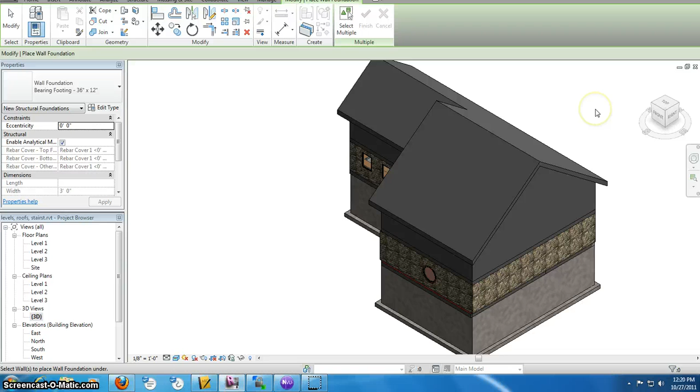Alright, one of the last things we need to be able to do to our house is put a site topography and dirt around our house, with maybe even some trees and other things. What I'm going to do is go into my site plan, and I should reset the roof visibility so I can see the roof and everything on there.

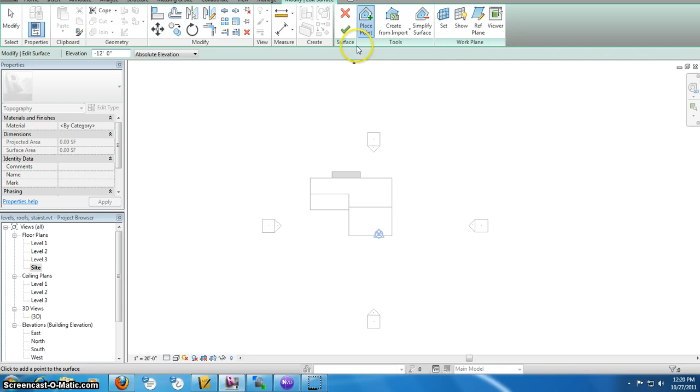I'm going to create a yard. So I'll go up to my Massing and Site button, and go to the Toposurface button. The first thing I need to look at is the elevation for my points. My basement wall was 12 foot down, so I'm going to go down negative 12 foot. Now it says to place a point, so I'm just going to left click, left click, left click, and left click. I just created my yard.

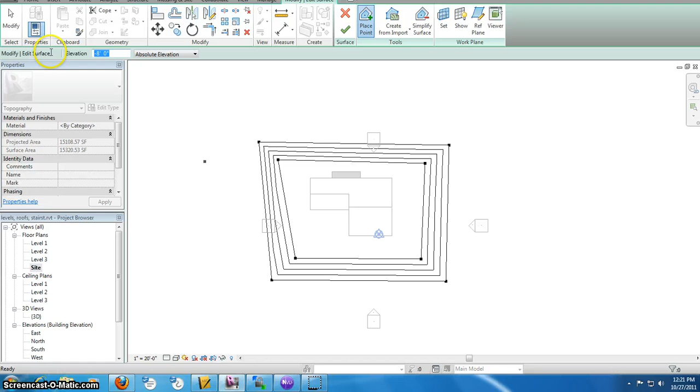Now I'm going to make a slope going up to my house. I'll come in here and go negative 8, and then put it in here. I'm going to take a gradual slope up to my house, coming in at negative 4. And finally I'm going to go negative 2 foot. Here I'm going to go around the house a little bit, making sure that I've got at least a 2 foot wall, or 2 foot down, below my house all the way around.

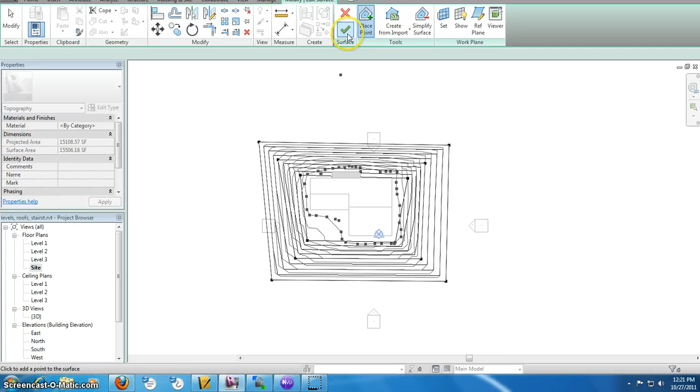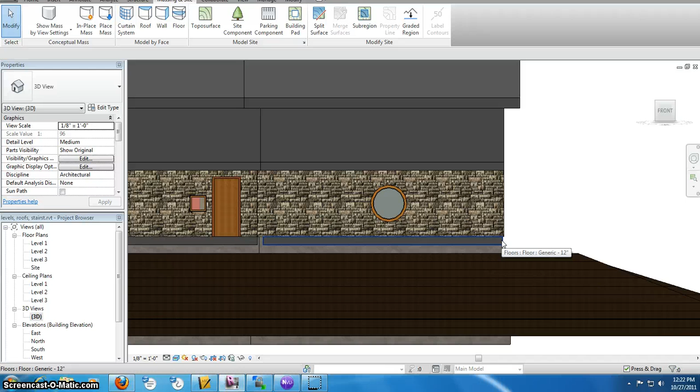And I'm going to hit OK, or the check mark. So now when I go back to my 3D plan, you're going to see that I got a yard. I started down negative 12 foot and then sloped it up to my foundation. Notice that my foundation wall is sticking out of the ground - it should be sticking out about 2 foot, because that's what I set it to stay down for. And if you go around to any of the houses on the way home today, your foundation wall will always be sticking out of the ground a little ways.

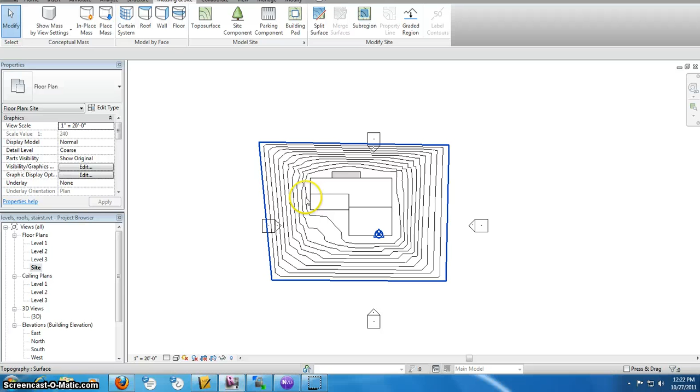The last thing you have to do, otherwise you might have dirt going through your house, is create a pad for your house. Here it's called a building pad. I'm going to go back to my site plan and say building pad, and I'm just going to select a boundary line going all the way around, choosing a line all the way around - you could do a boundary line as well. What this does is it takes out any of the dirt that would be going through my house. We're basically saying, hey, dirt's all the way around my house, but it doesn't go through the house.

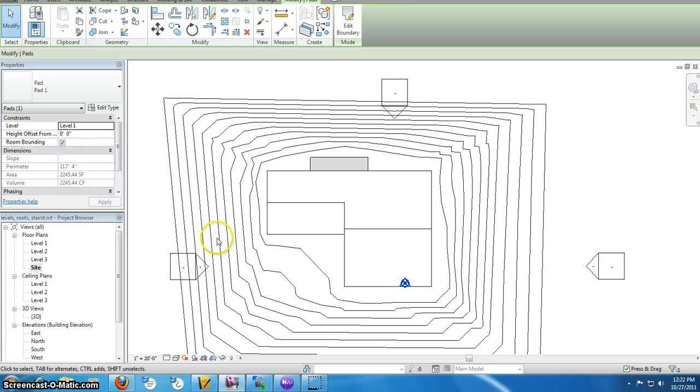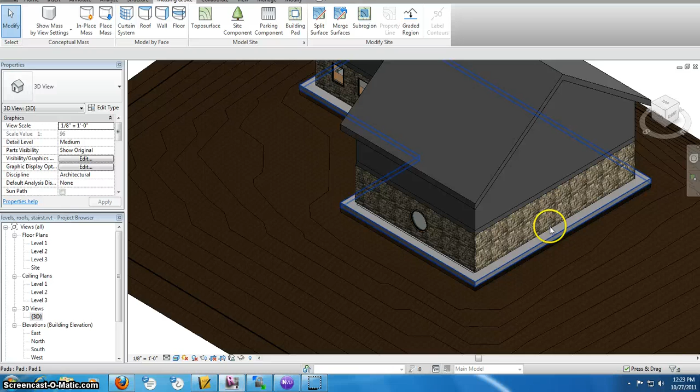You might not see any difference from what I just did here, but if we were in 3D mode - I should have showed you beforehand that the dirt was going through the house - now that I made that building pad, there will be nothing around. Oh, look at that. No, what it did is it actually created a concrete block around there, and since I used my 2 foot overhang for my roof, that's why you're seeing it. You'd normally take your roof off and go around just the outside walls of your house, and then the dirt stops at the house.

Again, that's what I'm looking for when we're doing topography.